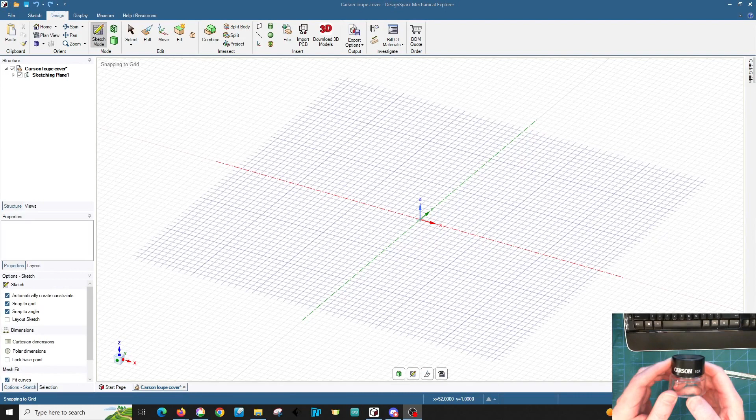I've got this loupe and I don't have a cover for it, so this area tends to collect dust. So we want our handy vernier caliper. I'm going to measure that. There's our dimension. So I'm going to add another, say, 4 millimeters to that to make a cover.

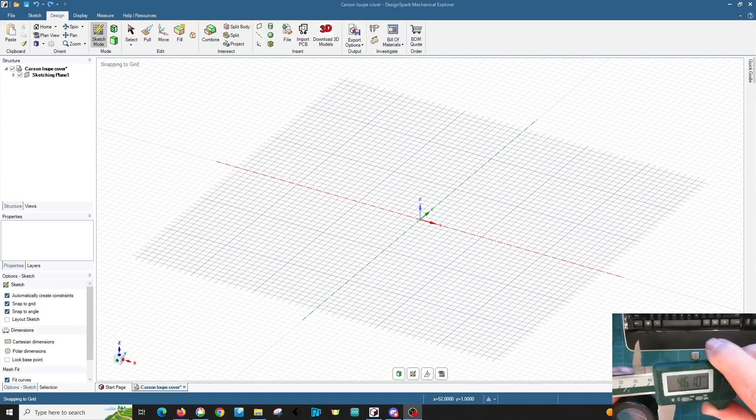So we're going to play a little bit with hotkeys in DesignSpark, which speeds up things a lot. So we said we wanted 46 over there.

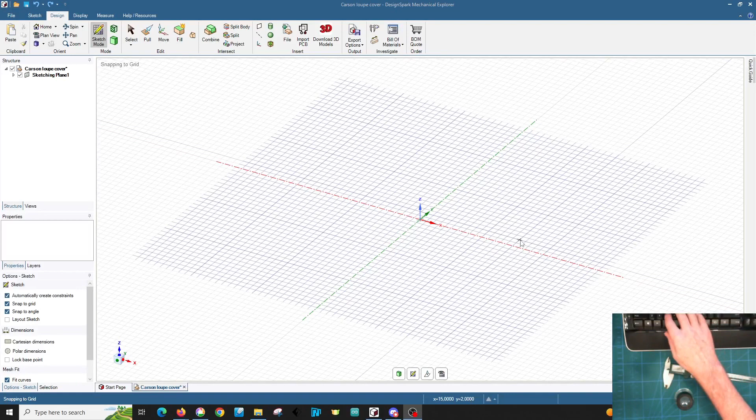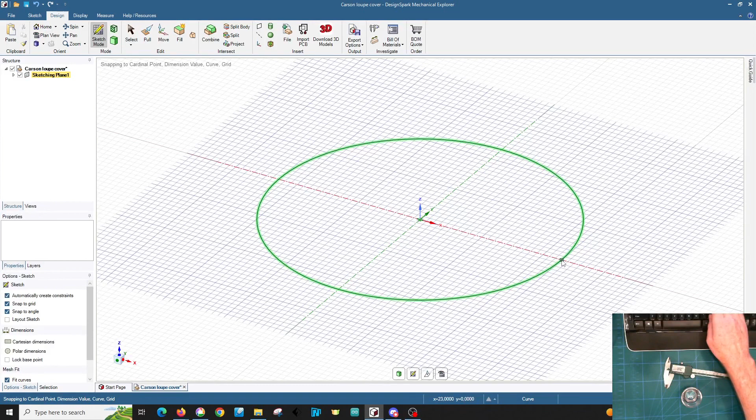Over here I'm going to hit C and I'm telling it I want a circle. I enter 46 millimeters and there's our circle. Now I'm designing it this way up, so I want to pull that up or extrude it. So I hit pull, select the plane, and pull it up by 2 millimeters like that.

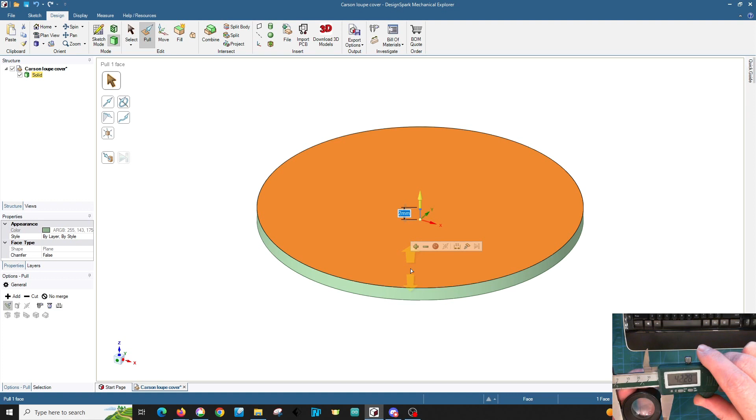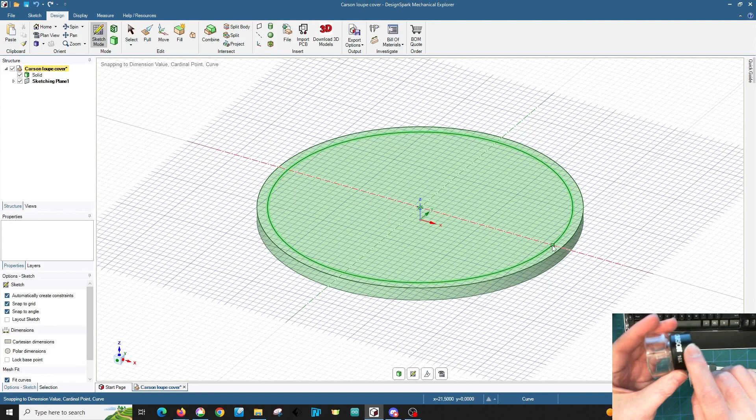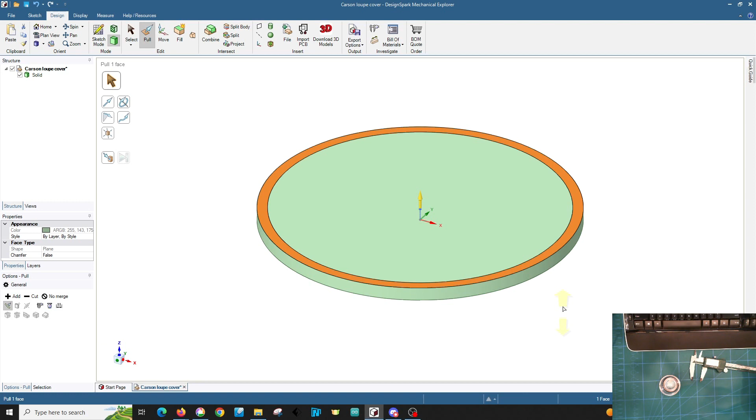Now we want to bring up this edge over here, which is going to be the cover. So I hit P for pull again. I select that. Let's see how long do we want that to be - 20 millimeters, we're good by the looks of things. So pull that up, tell it we want 20 millimeters.

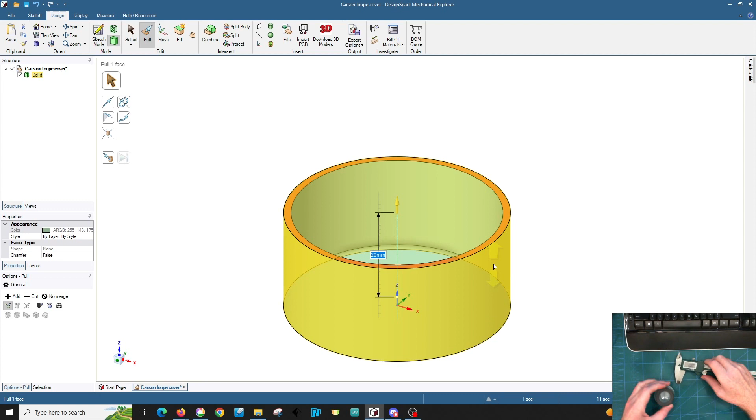So now we've got the cover and the sides are parallel. So now we need to taper it out, so we need to pivot that edge. What we need to do is measure this diameter at the bottom. So from 42 it goes to, call it, 44, so that's 2 millimeters, call it. That means I need to pivot that edge by 1 millimeter in each direction.

Let's start with the outside. So I'm going to tell it we want to pivot the edge, and just select the horizontal plane arrow, and we're going to move it across by 1 millimeter. I'll do the same with the inner one - move it across by 1 millimeter.

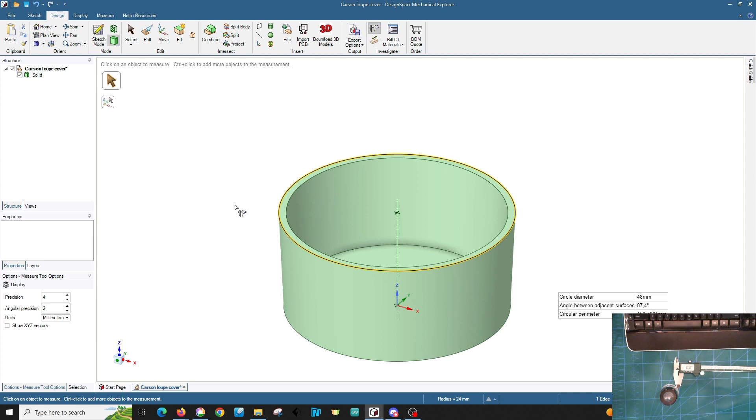So I think we're happy with what we've done there. So now all that remains to be done is make it pretty. So go back to pull and select round, and I'm going to bring that in by a millimeter like that.

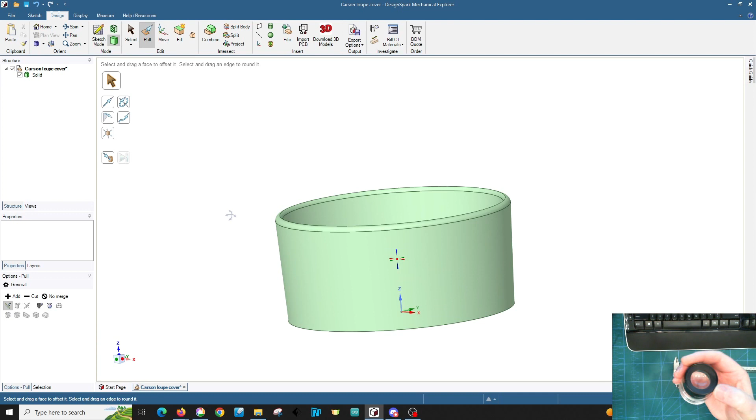Same with that, by a millimeter. So now we made that corner nice and round. Now the bottom needs to look pretty as well, so there's a little bit of a bevel on this. So what I'm going to do, bring the inside up by a millimeter, like that. Bring the outside up by a millimeter.

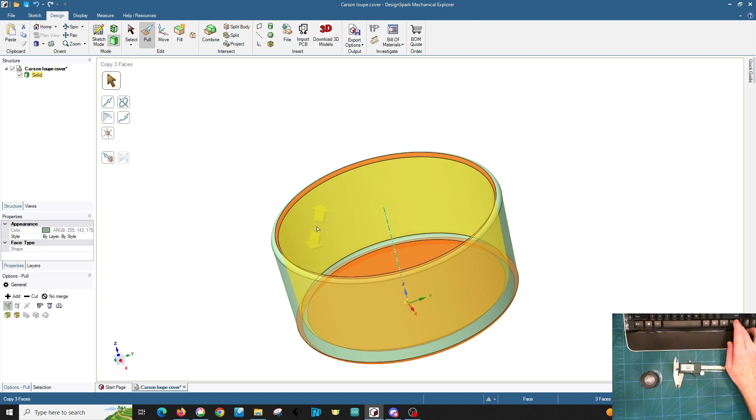Let's check how they look together. Hit Control. And deselect that. Yeah, that looks alright, I think that's going to work for us.

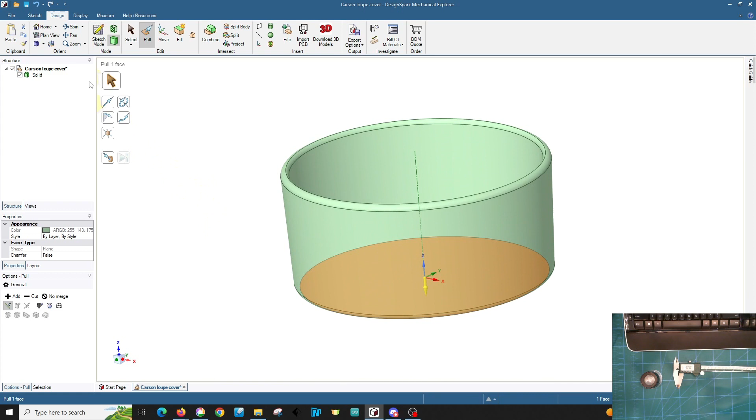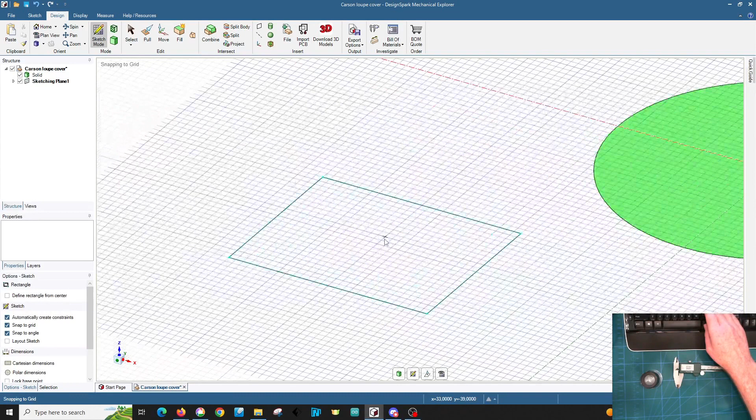Now, going back to hotkeys, just click home and it puts it like that. Now I've selected the bottom of the object. I'll show you how to add a rectangle to that. So let's just put that away over there. So R for rectangle is going to bring up the rectangle command like that. Now if I want to draw a line through that, I'll hit L. There's your line command, like that.

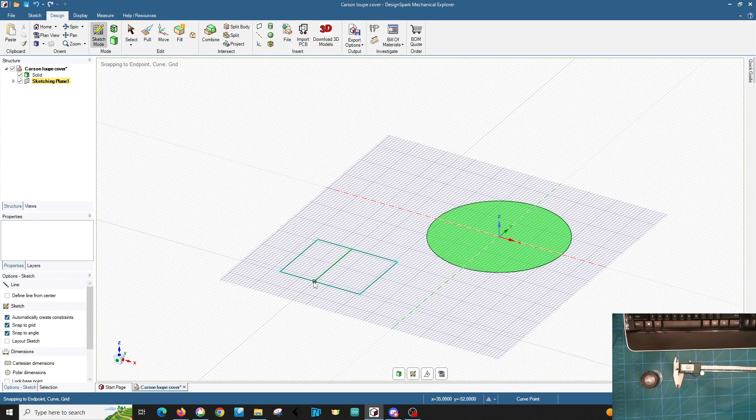So you've got circle, line and rectangle - these are your frequently used primitives that you work with. And then your pull command. Now here's another one that's important: if you want to move stuff around, hit M. Select your direction and do your move like that. You want to move that way, it moves as well.

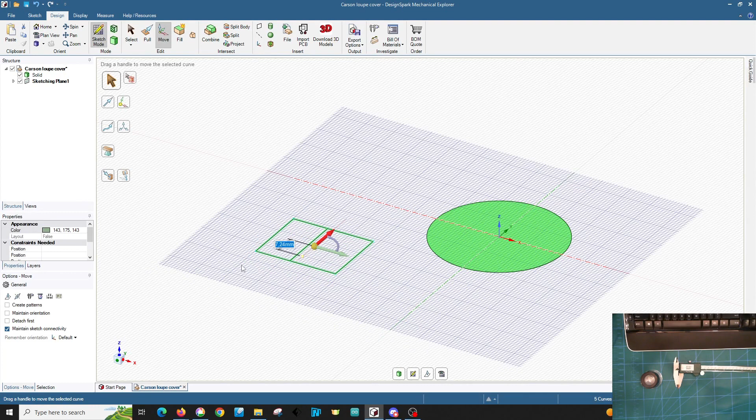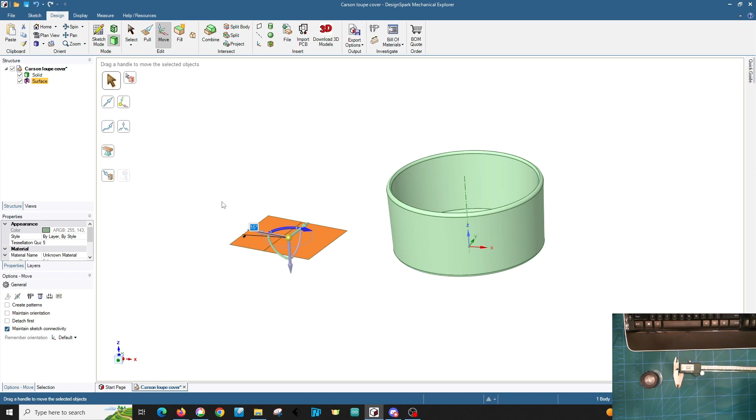Now if we go up here and we select 3D mode, hit M again, it brings up the Z axis, so now you're moving this thing on the Z plane like that. And similarly, if I want to spin it around, if I want to turn it by 90 degrees, you do that. There we go.

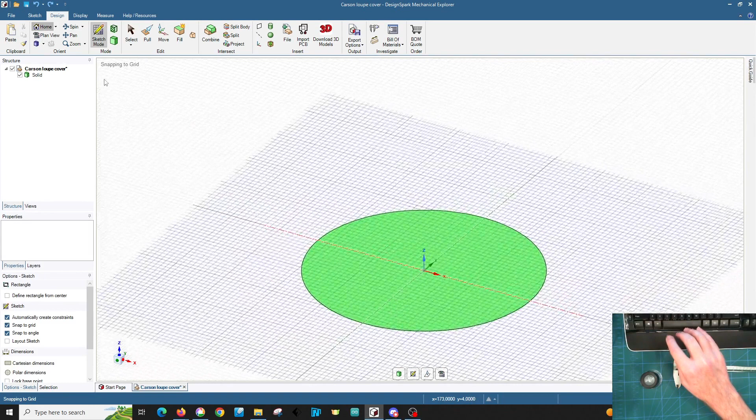So let's make that go away. Escape. So I think that's our completed object. So now we need to export it. I'm going to print STL, and I've called it the Carson loupe cover, and we hit enter, and there we go, it's exported.

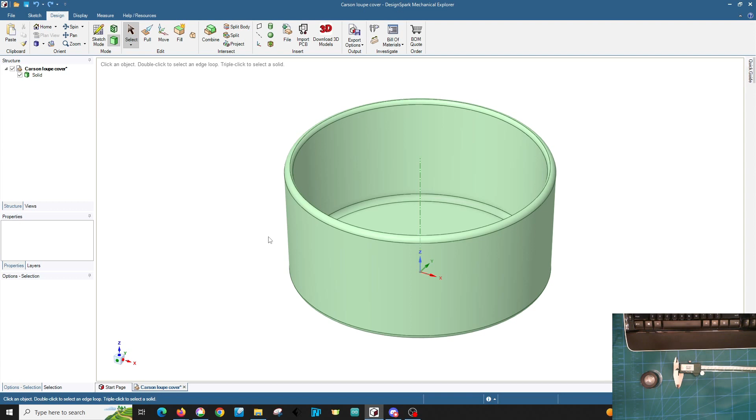Now I can put it into my slicer and we can slice it. And I know you want to see that being done, so let's do it. We click on the software for my Flashforge printer. Move it across here so you guys can see it, like that.

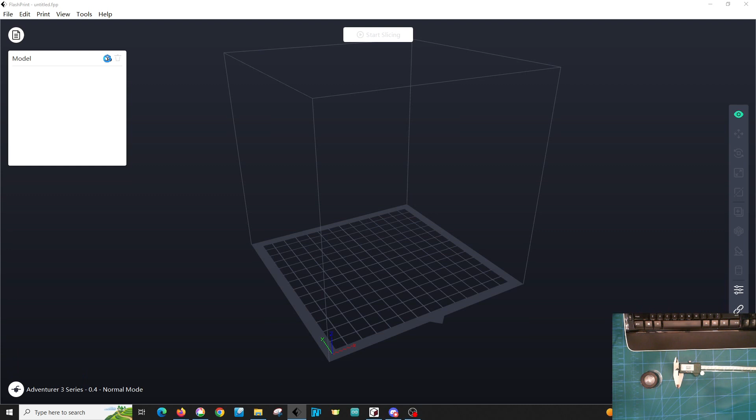Add file. We call that... let's go back here, what did we call it? C, Carson loupe cover STL. There we go. Tell it we want to slice it.

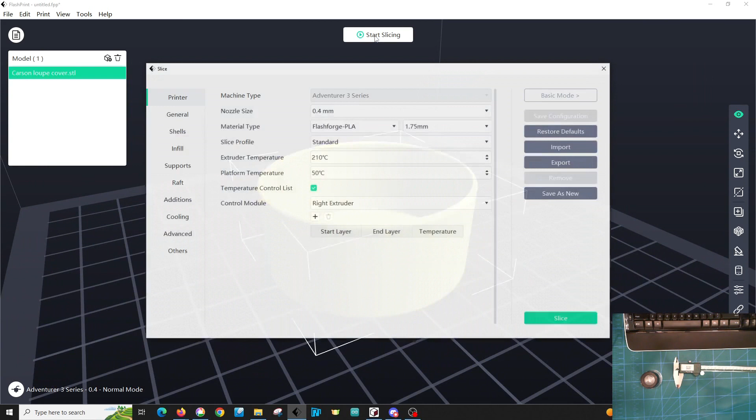I'm going to use default settings. I'm going to use a raft. I tell it to slice. Now I want to see what it did in the slicing. So it tells me it's going to take 54 minutes to make it and use 12.93 grams of material, which is 4.33 meters of filament.

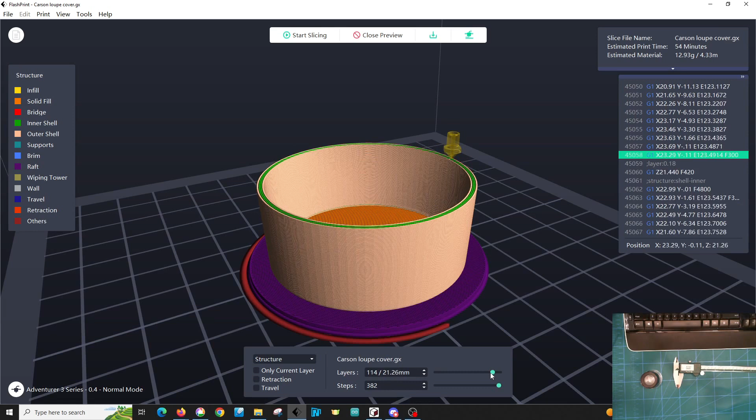And let's see what the print's going to look like. There we go. Drag the slicer down. There we go. I'm going to make that in black PLA, and then we're going to have a cover for this, and it's going to be nice and pretty.

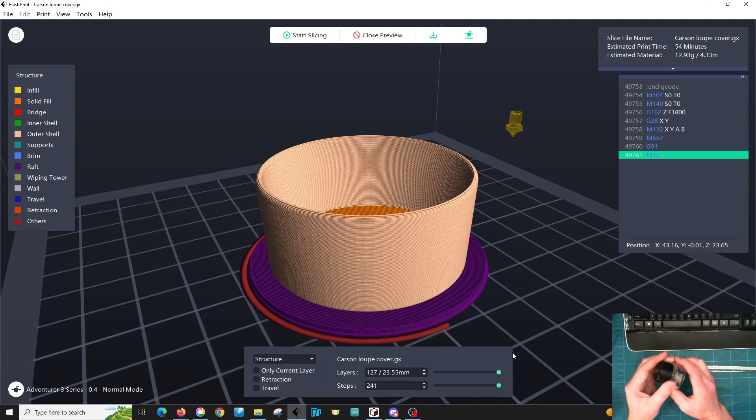So now it's time that it'll be done. Very good. So I hope you enjoyed this quick talk on 3D design and some 3D printing.